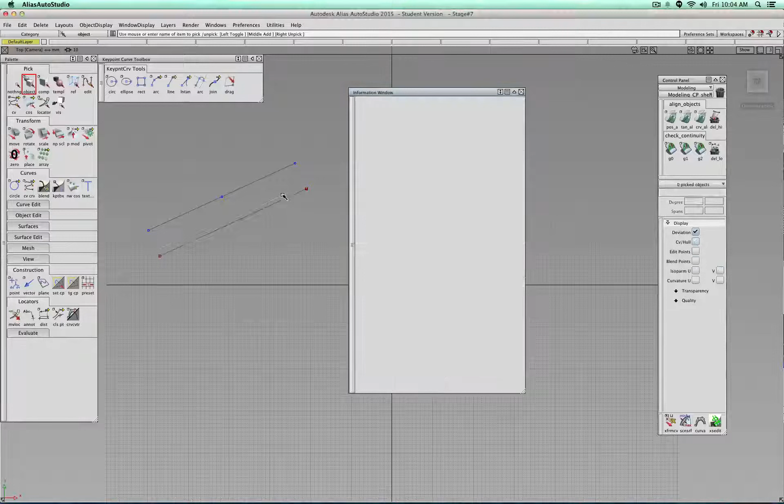However, the only difference is, you see 1 degree, 1 span, is that in Alias, key point curves have a little bit of extra information added to them to bend them into the shape you need. So if we go to the information window and click on this one, we have transform information, curve geometry, and so on. However, if we click the key point curve, in addition, we have attributes.

So for example, a length. I can set this one exactly to a specific dimension. That feature you do not have with normal curves.

So let's move this one to the side. That basically means that whenever you create key point curves, you can perfectly dimension them. You can't really dimension normal curves because they're bent, and everything that is linear or can be described as an arc or a circle can perfectly be dimensioned.

It only, as a circle, for example, has radius. But actually, we can work with something similar. I'm going to show you soon.

You can create an ellipse, so center point, one radius, and then actually you can go ahead, select the ellipse, and for example adjust the minor and major axis.

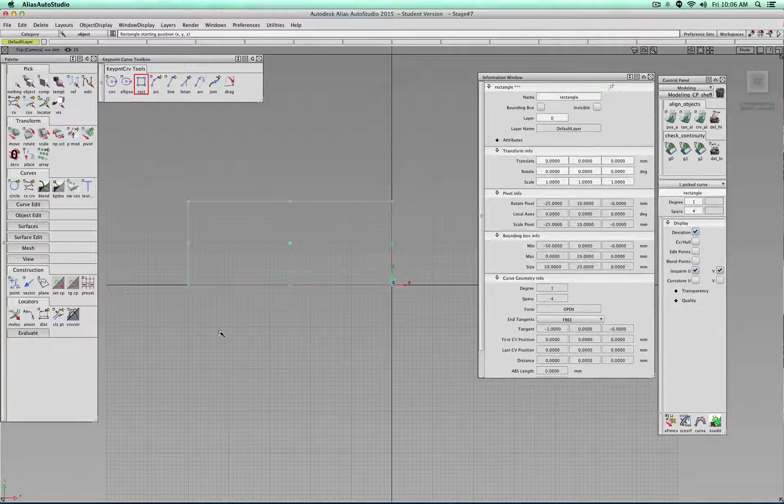So for example, we have the rectangle tool. You define upper left, lower right corner, and then it tells you width and height.

Then, for example, we have an arc tool. The arc tool is interesting, and we have multiples. So you can click, click, and click, and you see it actually from the first point to the second to the third.

So for example, if we do the same, click, click, and click here, you see I can also continue dragging it. So it runs basically through this point. Quite useful for when, for example, you need to create an arc kind of like this.

So for example, what else do we have? If you double click them also, you get the amount of degree and span, for example, you would like to use. With this one, we click, click, and then actually you drag out the center point.

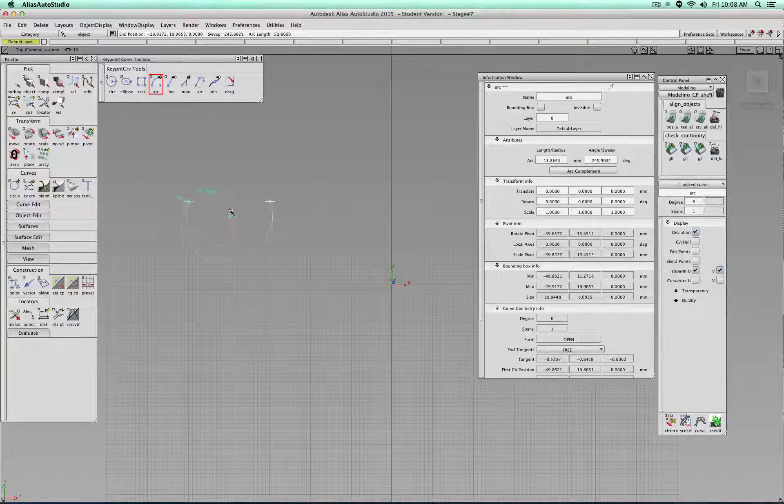Move it this way. And also here, for example, for the radius, we can clean this one up. We can change everything. Oh, it didn't let me do this.

It should here, 4. Oh, this is interesting, 270. 90. 4. No. Oh, yeah, I typed something in that was way too small for it, so it didn't really work.

So hold on, let me go back to here. Click, click, and click. Okay, so now this one.

And again, I can change this one. I can change this one to 5. I can go down to something that's too small if I make this one 10. Or if I make this one 40. You see, there's this point.

So you have to understand a little bit of geometry, of course. This is like the radius of 10.

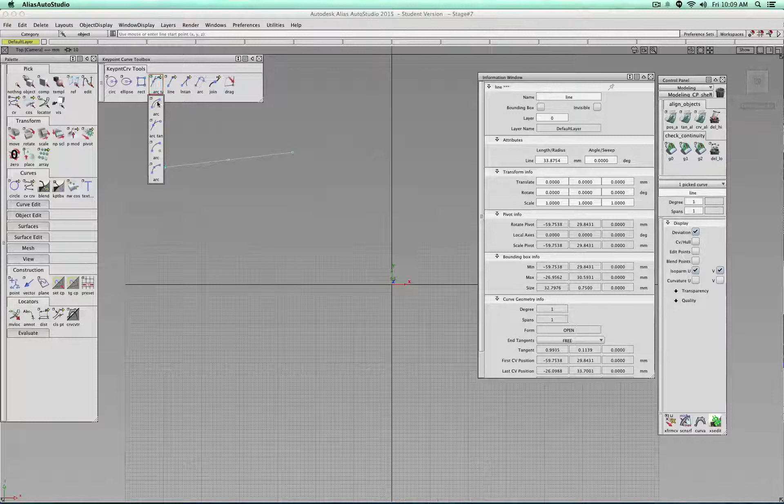There's also, for example, to make an arc that's concentric, or to make an arc that is tangent out of a line. So for example, click and click, there's our line. Let's go to this one. So Control Alt.

And now this arc which I'm creating is tangent.

So you see how it flows out.

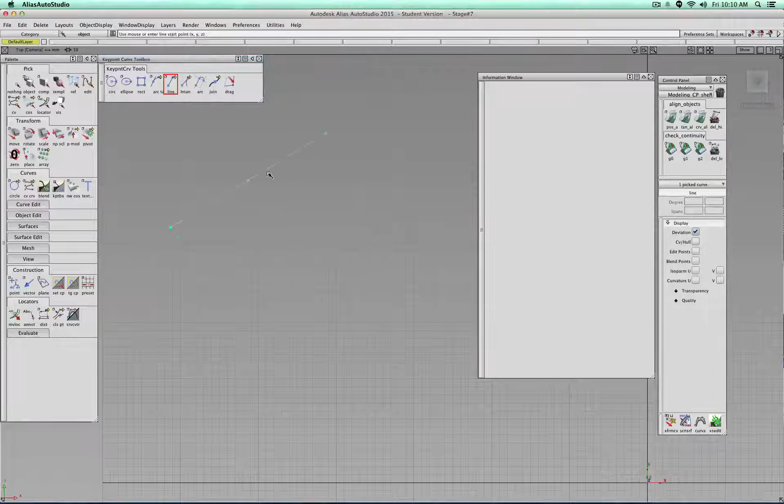Okay, let's take a look at lines. Very simple, left right click, you have length. There are different types of lines. We can also have zigzag lines, so those are like a polyline. They're simply joined together.

I will keep this one. Actually, no, for the moment I'll show you this one. You see here we have join and break. This means you can break or join lines like in Illustrator. Break, break, and break.

See, now I can select those. And if we go back to join, I click on a corner point where two points meet, and you see then they're joined. When you join them, you see the lengths of all these lines together. So this is actually pretty nice.

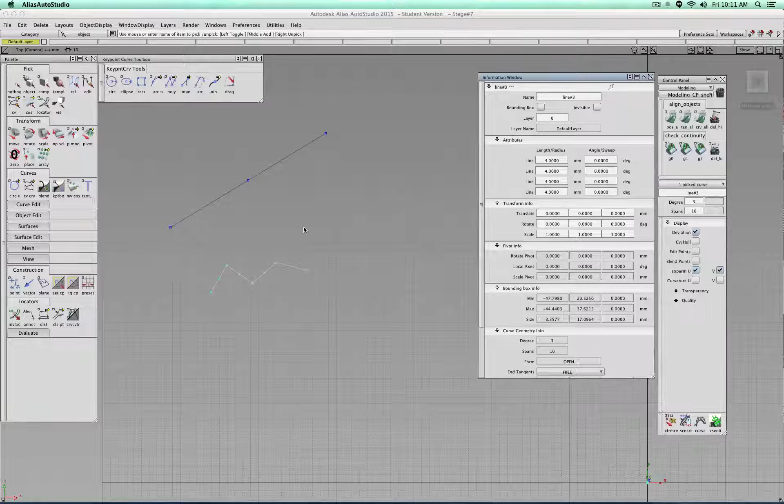Perfect. Okay, let's go to maybe parallel. Select a curve to make a parallel line to this one. And then here, and there's my parallel line. So very easy. Let's make another normal line and parallel. Oops. Select this line, drag it out, and you see the distance there.

Curious if this actually works. No, you can't on this polyline, only on the segments. Okay, what else do we have?

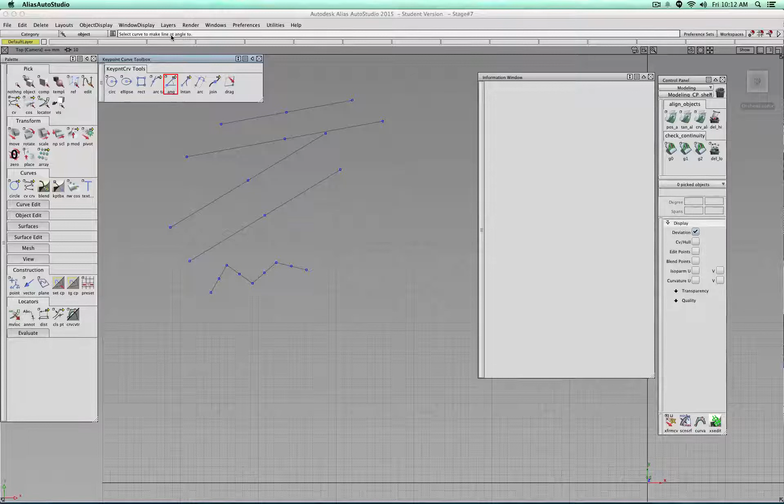An angle. Select a curve to make a line at an angle to. So for example, this one. And then there, you can specify the angle.

Okay, next let's take a look at how we can draw a line, for example, perpendicular to something, between, or tangent. So let's create maybe an ellipse. And then let's click the perpendicular. And down here you see from curve, so I can click on this curve. I don't have to click Control Alt, I just select this curve. And you see I decide where a slider is.

FYI, if I want a very specific point, this is a good situation where maybe we can work with the snap grid. So then I can press Control Alt and you see I have all these snap targets. So maybe here. Nope, maybe I would like something more like 8 segments there. So at this point, and then I click somewhere else, and then you see it drags out a line.

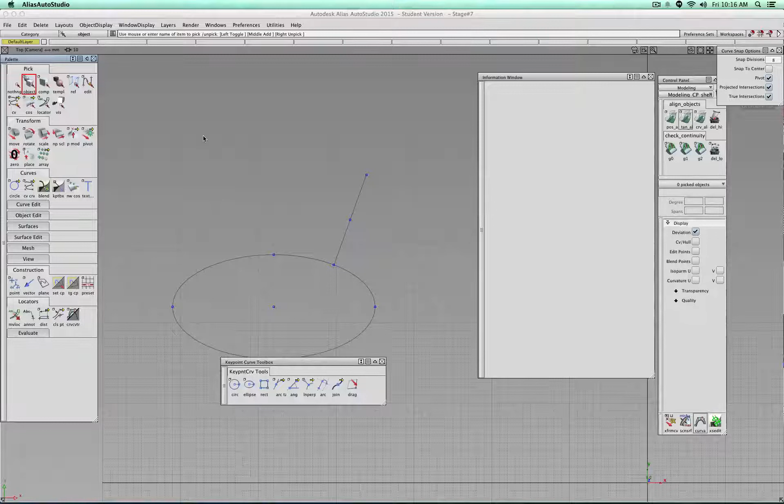Now you can actually also create, if we double click it, say not from a curve but to a curve. So I click somewhere here, and then I click to where it should be perpendicular to. And it doesn't need to be a curve, I can also make it on a line.

So that's how you create a perpendicular line to an object or from an object. So let's go and take a look at this one. What do we have here? Double click to see there are no options. Okay, so what does it say? Use mouse to enter start point. There you see now it made it tangent to there.

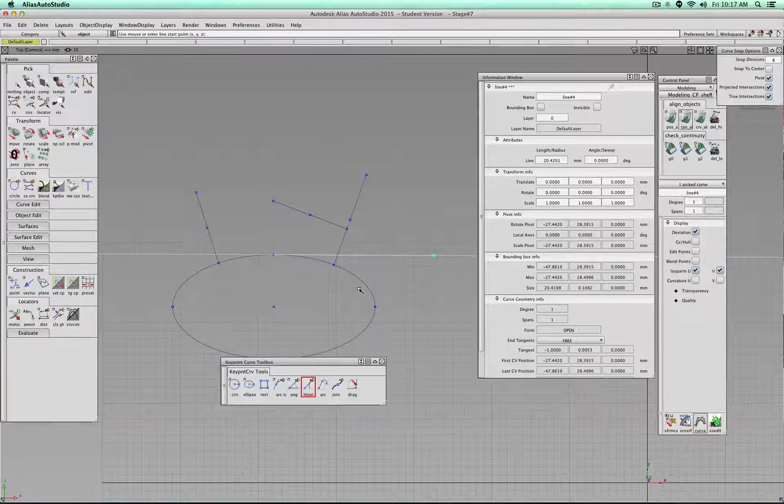So maybe here, and then click this line. You see that it creates this line tangent to here. This, of course, will not work because tangent means it needs to be exactly on the same line, but I can click it on here, there. So see, it's not very difficult to create lines this way.

Okay, next one, this is actually a little bit more interesting. So let's say you have some gears or other objects and you need a line that's in between. So here to maybe there, then it creates a line that's tangent to those parts. There, and there, there, and there.

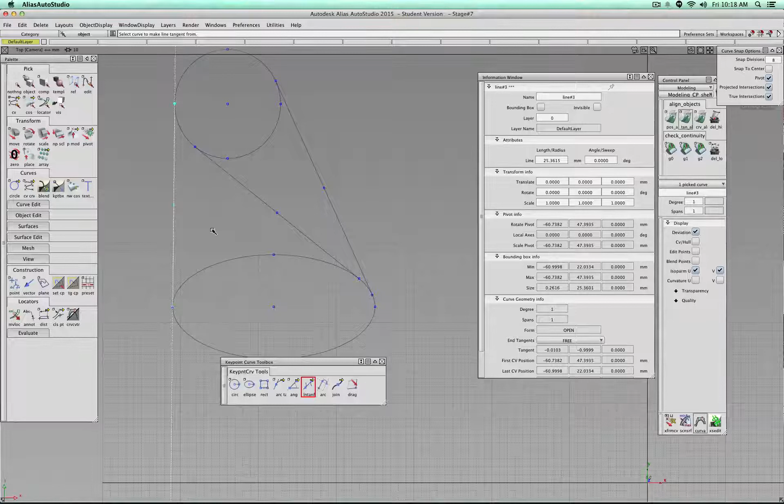And you see, these lines were not created where I clicked. I simply specified the side. So let me delete those and do it again. I click somewhere on this side and somewhere on here, and then it creates it there. Now, maybe I should have clicked here. So you see the order is important.

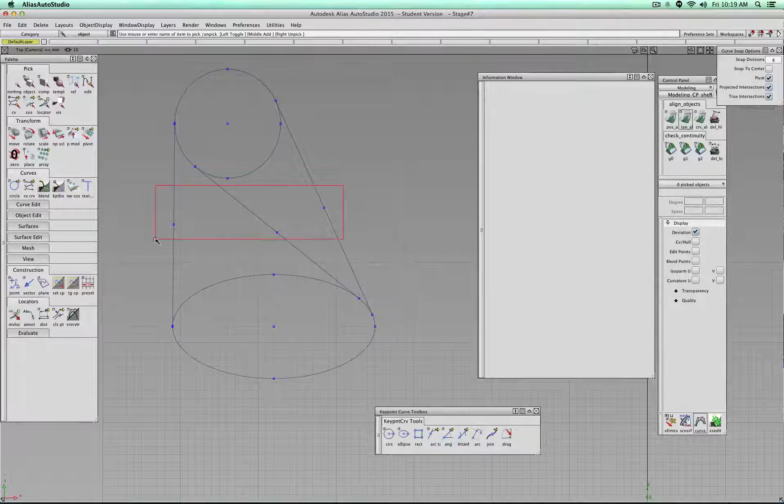Okay, that's how you create lines that are tangent between two parts. Now to create something that's perpendicular between each, unfortunately, there we might actually be slightly out of luck.

That's maybe where other tools have more tool sets, but Alias is not really a CAD application. It just provides some basic 2D drafting tools. Let's see if we can figure this one out, because there's no direct option for that. What we'd need is like a perpendicular tool where you could create a perpendicular line between two points, but we only have the tangent one, unfortunately.

Okay, what do we have here? The arc tool. Always pay attention to your interface - it says use mouse to enter arc point. Ah, I see, true. You just create a line and then let's do this again. Click and click, so this is a nice line, and here's my radius, my arc I meant to say. So it creates it for you.

And again, those are two objects. I can simply break them. See, there are. I can also join them - oops, I have to click on this point where to join. And then let's click them, and you see there's a line and there's an arc.

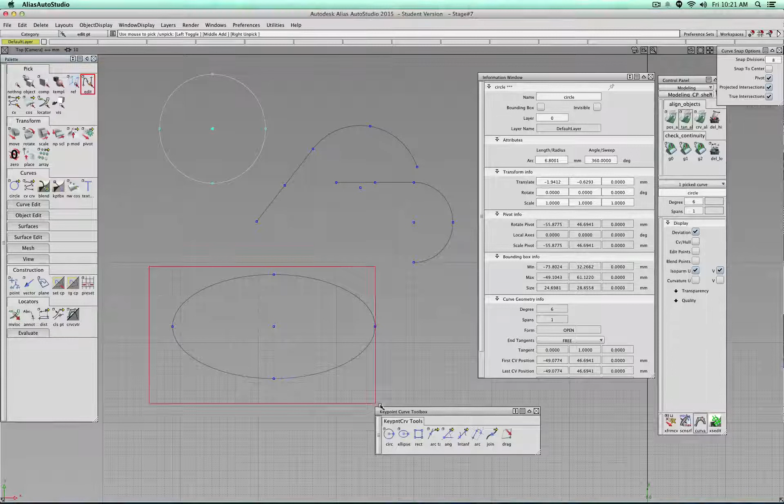However, there's something else I can show you now - that join and break, and there's this drag. With drag, it's different than, for example, clicking an object and then moving. And we have select CV - there are no CVs. We have select edit points - there are no edit points. But there are those blue points, and they can be used with the drag tool.

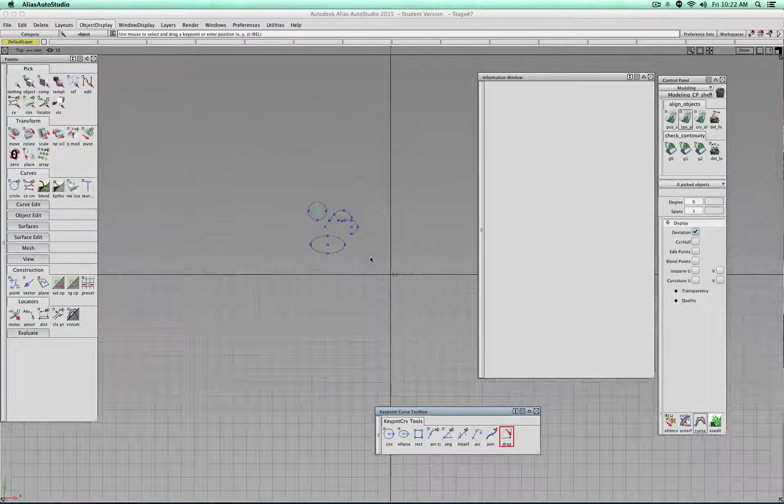So we could actually click on something and nothing happens. And I mentioned before, always pay attention to what's presented there. It said a snap mode must be on to move key points in perspective window. So interestingly, I'm in orthographic - yeah true, this is actually a perspective view, just FYI. And we also have a dedicated top view, so this is just straight top view. You see my 3D cube is gone.

And now here I can actually drag those easily because I'm more or less now really in 2D drafting. There, for example, you see I can adjust the radius by simply repositioning those points. I can also change the midpoint - so here I'd say the arc should stop here, I could say the center, so the radius. So now I'm working with the radius of this arc, more or less, and now I'm going to work with the diameter.

Now I'm going to snap this one to there. No, I can't do this actually - interesting, okay well makes sense. There and there. So you see here, for example, and there it breaks. So just be careful that only because you change this line, the radius doesn't update - while they are joined, they're not like constrained, I would say, so that when I move this point down, this arc rotates with it.

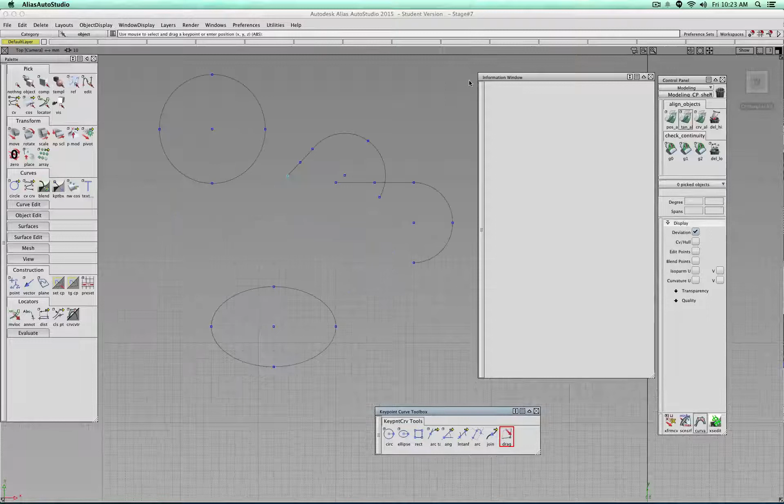So if you draft, if you need to do something like this, it might actually be a good idea - so it's easier for you to switch to those views, or simply what I do, maintain working in perspective, just switch to orthographic. To do the same, all we need to do is press the Alt key for the grid snapping, or for example, the curve snapping. See, I can also snap those points onto something.

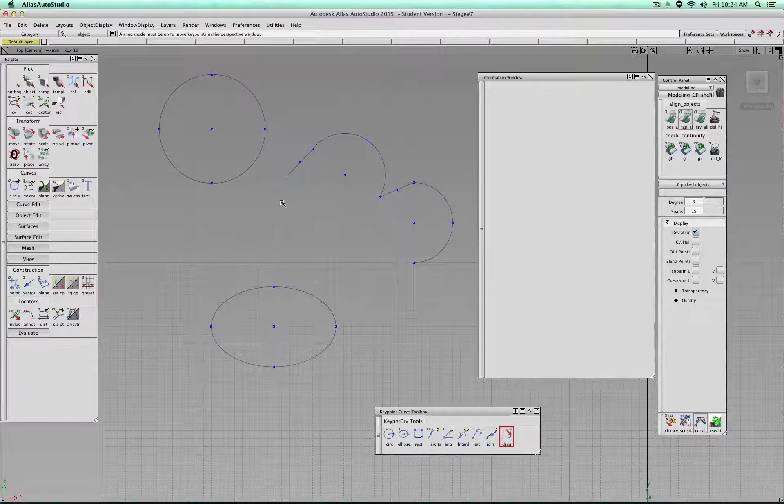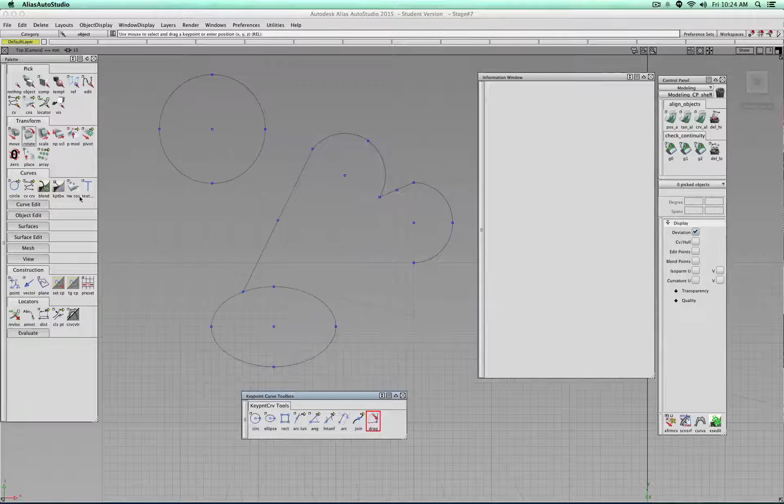Okay, and I think that basically covers nearly everything in terms of key point curves. The key point curves also create - let me go back to general settings - they create those guidelines. You see all those guidelines here we created. Every time when you create a new line, there for example, there to there, it also adds a line.

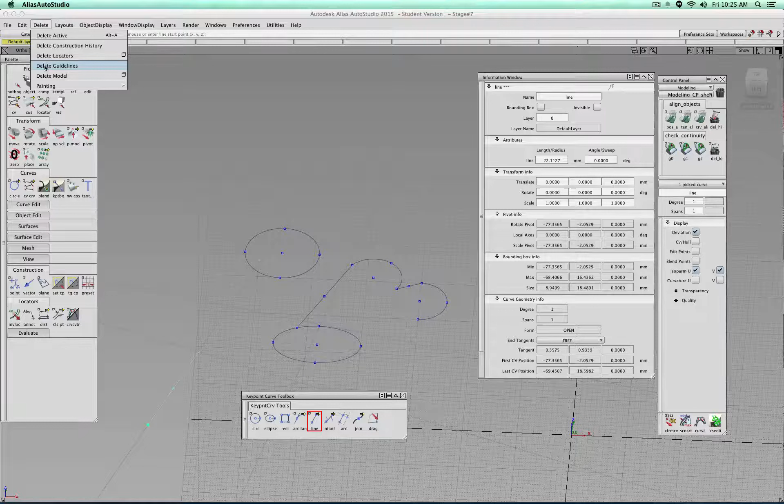I mean, they're not necessarily bad, but I feel like sometimes they can be very confusing, which is why you can either, after you drew, delete all those guidelines, or simply go to general preferences and set this one to 0. Then you don't have to delete those, and you also don't see those guidelines. But honestly, I never really worked with them, to be quite honest, because with the drafting tools and the grid, that's basically all I really need. And yeah, that's really everything about key point curves and 2D drafting in Alias.